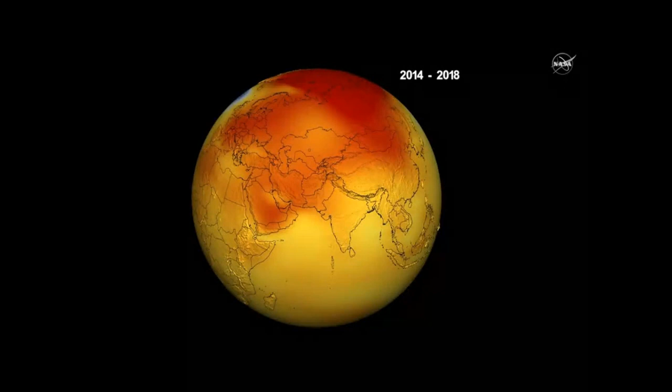And this is since the industrial revolutions. There is a link between our activity, mainly use of fossil fuels, and our emissions in the planet. If we imagine Earth as a system, it can regulate its temperature, and it has the ability to auto-regulate itself, like a negative feedback would do. But only when there are minor disturbances. In climate change and global warming, at some point the disturbances begin to be so high that the system becomes unstable, and they can have catastrophic impacts like pack ice melting, rise of ocean temperature, ocean acidification, the loss of regulation of CO2, and also de-icing of permafrost.

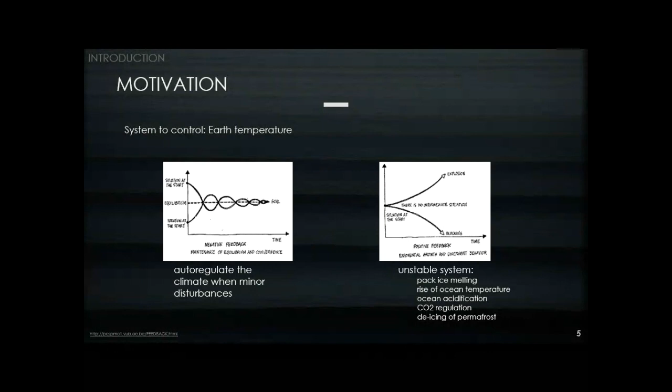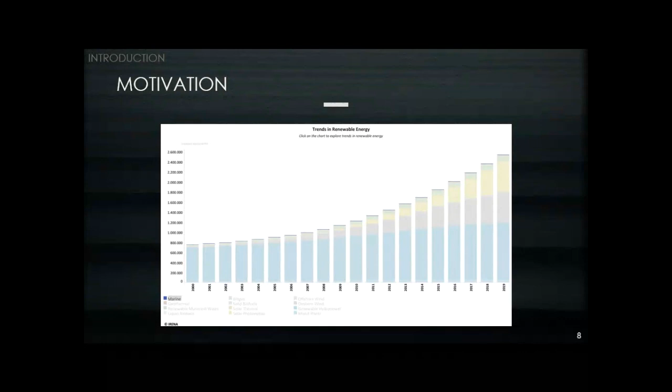In the past 20 years, here's the global trend for renewable energy capacity installation. 20 years ago, almost the majority of the installed capacity was hydropower. If you look at today, there is a huge increase and an important share of wind and solar energy. I think innovation is still ongoing there, but it's more incremental innovation, and I think there is space for research and development in marine energies. So there is motivation to work on that field. In these marine energy technologies, we can think of tidal energy, wave energy, osmosis, ocean thermal energy.

And the one I wanted to focus my work on is wave energy, because it represents a huge amount of power. The resource that is accessible in Europe can represent 3 times the European power consumption.

We know there's a huge amount of energy, and mankind has always tried to protect itself from ocean waves, building harbors or making more robust ships. There are a lot of challenges here. First, we want to produce power, but it's usually associated with costly operation and maintenance. The devices to capture power have to survive winter storms, and they are also subject to corrosion and biofouling.

Now moving on to some generalities. What are ocean waves? Wave energy is a sort of solar energy, because the sun creates wind and the wind creates the wave.

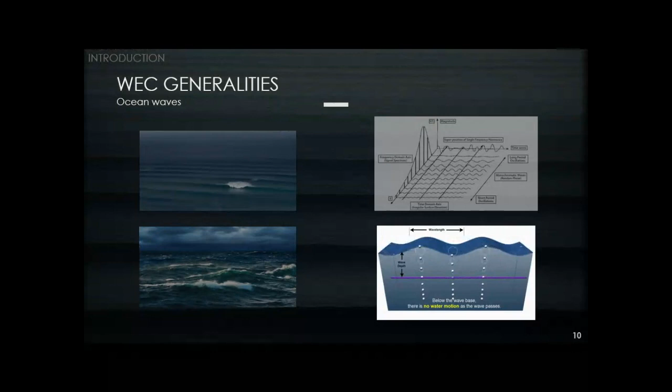There are several concepts that have been developed to capture this energy: the attenuator, a flap type, a point absorber, one which relies on pressure differentials, pitching devices, overtopping devices, and other more innovative designs relying on a deformable rubber material.

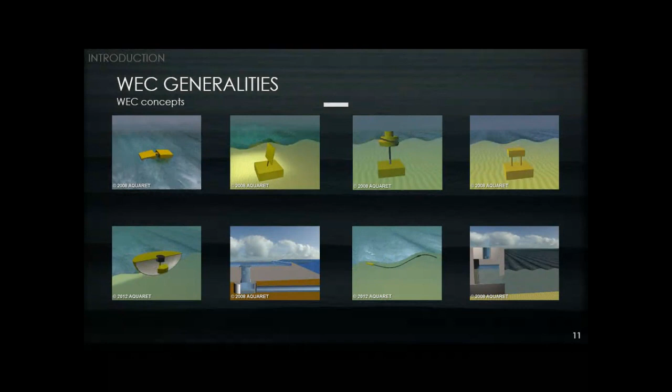What I wanted to state with these different concepts is that wave energy is not converging into a winning technology, like has been the case in wind energy, where we now have the three-blade horizontal axis turbine, which allows cost effectiveness and reliability. So there is still room for innovation here.

Now moving on to the scope of that research, I wanted to introduce some concepts here. In wave energy conversion modeling — how the devices move due to ocean waves — we rely on concepts of hydrodynamics.

These express the motion of the device and the several forces in presence, like the excitation force, which is felt by the body due to an ocean wave, radiation forces, hydrostatic forces, power takeoff force — the one we actually want to capture and convert into useful power — and other forces related to mooring forces and drag forces.

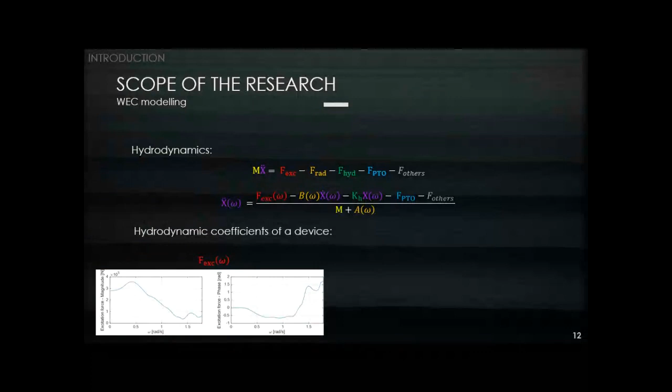What's important to notice here is a device has its own hydrodynamic coefficients. You can see its response in the excitation components, both amplitude and phase, and also added mass at infinity and radiation damping. These coefficients can be obtained using hydrodynamic solvers like WAMIT, NEMOH, or AQWA.

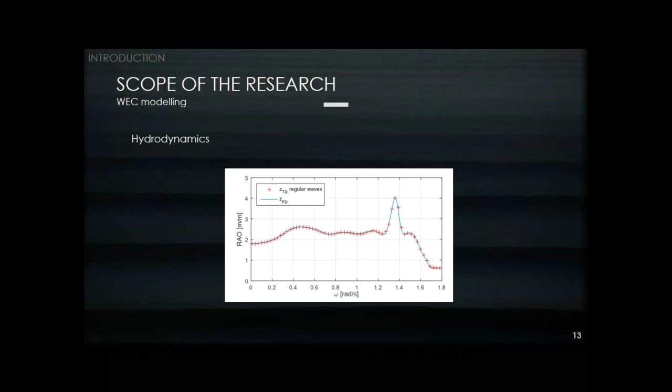Moving on to control for wave energy converters. Why do we want to control them? Well, of course, we want to extract power and optimize the energy output, but we want to do that while ensuring safe and reliable operation. We also apply control to ensure good grid connection and integration of power into the power network.

Earlier, you saw the force we are trying to optimize, which is the power takeoff force. It can be simplified as a damping coefficient, CPTO, proportional to the velocity, and a stiffness coefficient proportional to the position.

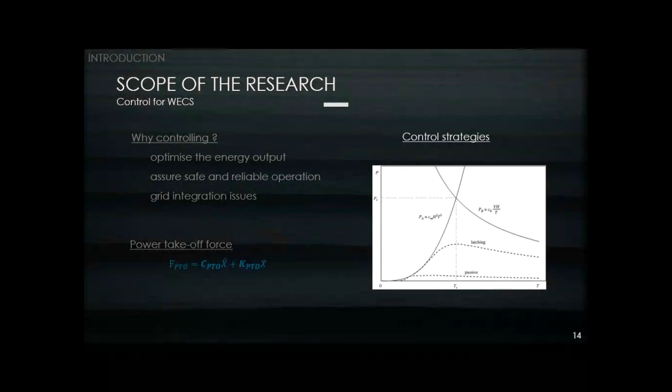It needs to have a force in the power takeoff. The power takeoff is able to give back energy to the system so that it can change its motion and be closer to resonance condition. There's another control strategy called latching. It's phase control, and it also tries to change the motion so we can recreate resonance. There's also a passive one, which is not very efficient.

What happens if we change the damping coefficient of that force? You remember the RAO of Mutriku, shown as the blue line. As soon as you increase the damping coefficient, you decrease the motion and extract power, which you see at the lower graphics. Globally, if you integrate across all frequencies, there is an optimal damping coefficient that lets you maximize the energy production.

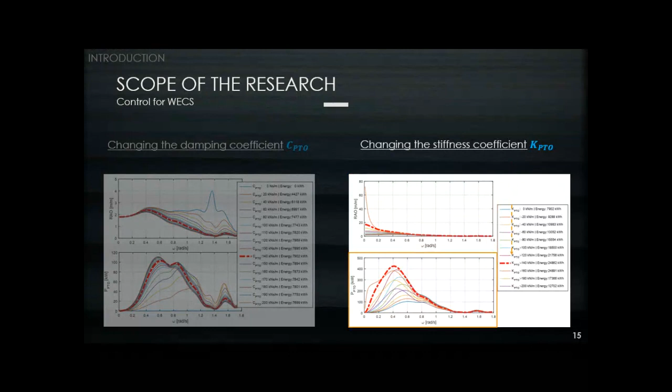And if we change the stiffness coefficient, you change the motion. There is a higher increase in the power production—the energy is in fact 3 times more important in that case.

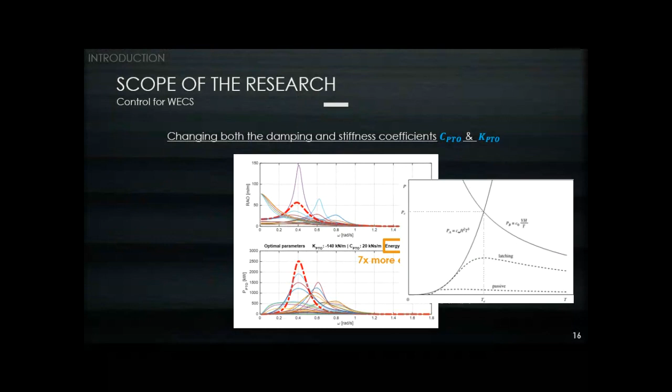So what happens if you optimize both of these parameters? The motion is way higher. For a 1 meter wave, at the resonant frequency, it can go up to 150 meters—not very feasible in practice—and the total energy is like 7 times more. You can see with this graph that you can make a parallel with the theoretical curves of maximum power extraction.

Then control for the oscillating water column. Here you can see the several steps of energy conversion from the wave to the wire, the electrical wire—this is why we call them wave-to-wire models. Where can we apply control here? We can apply control at the interaction between the wave and the device.

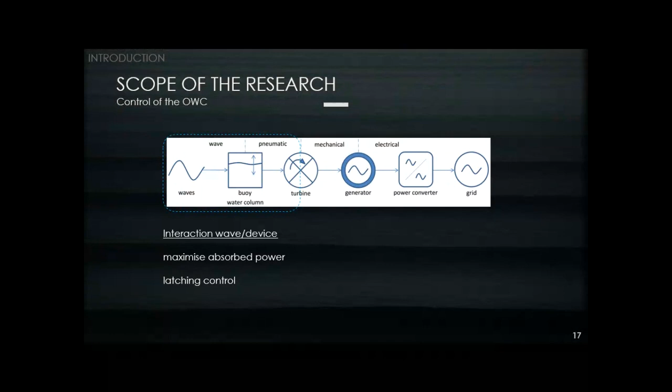We want to maximize the absorbed power, which can be done by latching control for the OWC. By actuating the latching valve, we can induce a perturbation in the pressure and change the motion of the device. Also, when there is absorbed power, we can control or optimize the energy production in the power takeoff.

So here you have several elements of the power takeoff, the turbine and generator, using rotational speed control. Also, which is not explored in that thesis sadly, grid interaction control—here you want to increase the quality of power you inject into the grid.

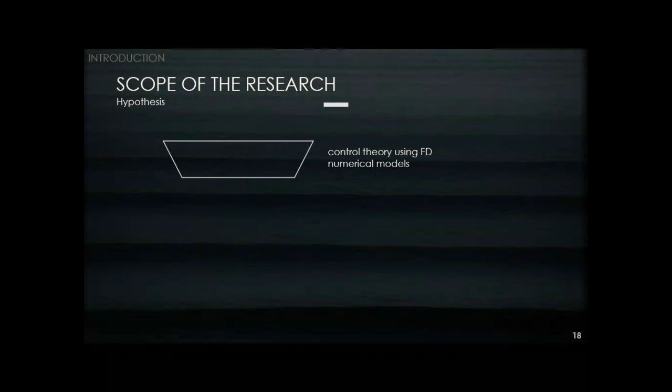Some hypotheses: I've seen in this research several or many references for control theory applied to wave energy conversion, most of the time in the frequency domain, and several approaches for applying this control in time domain models. This is also the case for predictive algorithms, which rely on knowledge of the future incident wave to optimize control parameters for better power extraction effect. But these algorithms, when entering control for oscillating systems, well there are not that many.

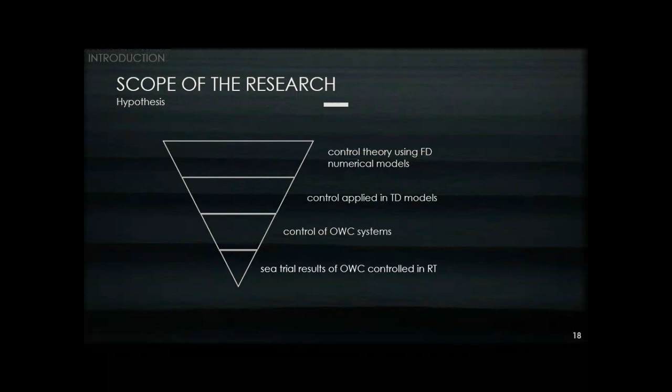In fact, for real sea trials of that type of algorithm in real oscillating water column devices, I only know of one. So there is room here for innovation, and this is one of the motivations of this work. It lacks experimental results for advanced controllers, especially predictive ones. To reach that, we need to develop these algorithms, test them, and assess them. To do that, we need accurate numerical models, and to reach experimental and sea trials, we also need to solve implementation issues.

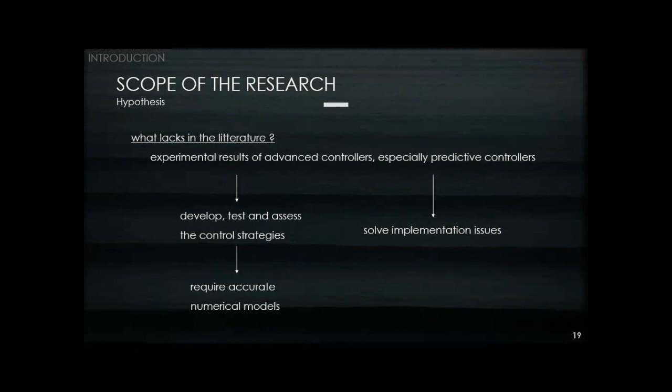The global objective of the wave energy sector is to lower what we call the LCOE, the cost of energy production—the ratio between costs and revenues. Revenues are associated with the quantity of energy you are producing. So the general goal of this thesis is to optimize this energy production through the use of advanced control strategies, and to reach sea trials to prove that these algorithms are actually viable.

In fact, we have some opportunities here in the Basque Country. We know of this device called the Mutriku, or oscillating water column plant. It was grid connected since 2011, has produced more than 2 gigawatt-hours of wave power injected to the grid. Also, a company named Oceantec, now acquired by IDOM, developed its Marmok buoy, installed at the test site close to Armintza for two years, surviving 3 winters. So there are opportunities for testing these algorithms in these 2 devices.

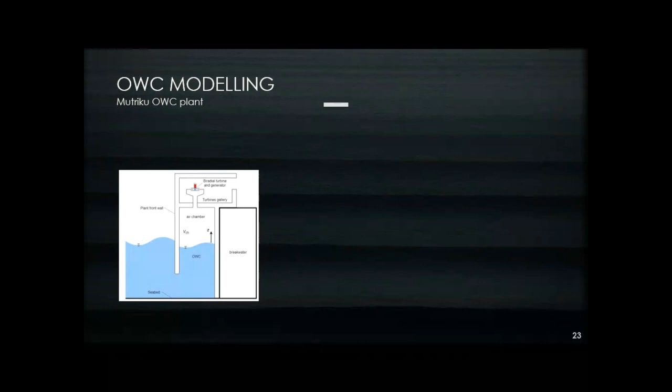This is a side view of one chamber of the Mutriku plant. This is the geometry of the plant and its surroundings, done to obtain the hydrodynamic coefficients, by some colleagues in the OPERA project. What's important to notice is that it's important to take into account the surroundings of the plant to capture all this changing in motion.

So seabed conditions are important, neighbor chambers also, and they are all integrated into that model. What I did here is, from these hydrodynamic coefficients, create the time domain model. Here you can see the excitation force, how it's expressed, the radiation force, hydrostatic, and power takeoff. The radiation force has a term called the convolution integral, and we have to use some methods to solve that—we'll be using the Prony method in that case.

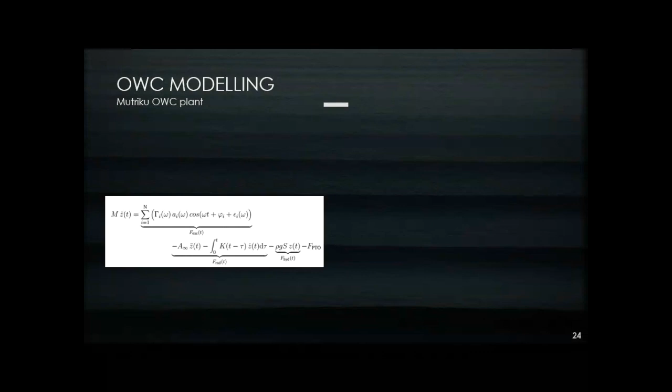Then moving to the spar-type oscillating water column, here is a side view also. What's important to see is that it has two bodies: one is the floater and the structure, the other is the water column itself inside the device. In fact, it's the relative motion between these two bodies—each has its own response, which creates the power absorption.

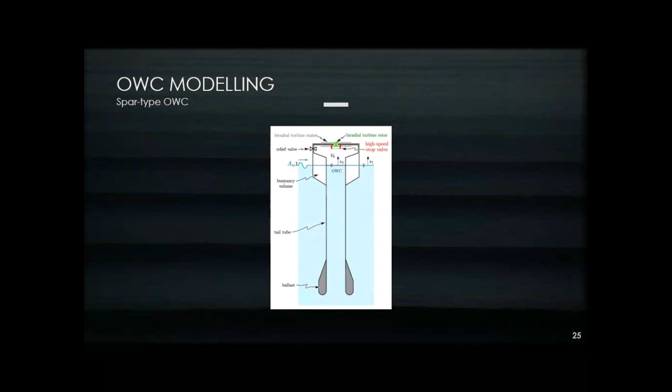Here we are on track. So we solved the motion of the device, and now we're moving to the modeling of the air chamber. In fact, the force of the power takeoff for an OWC is the force of the pressure inside the chamber—the pressure variations multiplied by the area of the internal water surface, the oscillating water column.

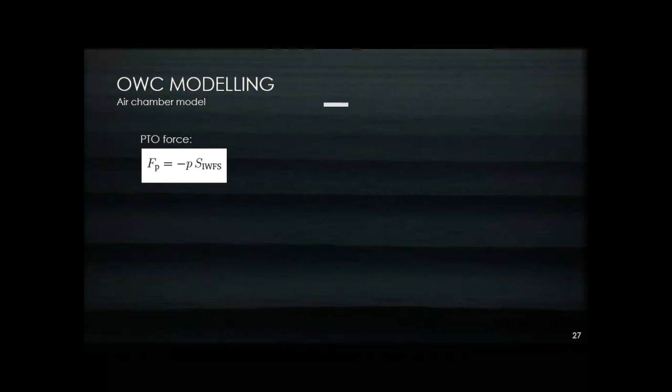But this pressure is a gas, and you can assume it is either incompressible or compressible. We wanted to model all three. The isentropic process is state of the art, and the polytropic is another contribution of this thesis.

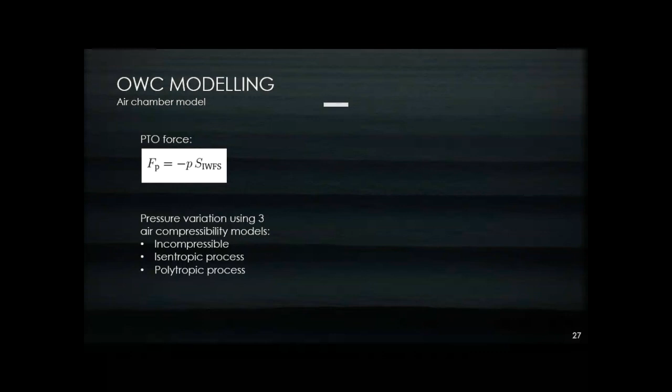What is the effect of that change in the pressure variations? We see some simulation results, time series of the three powers in presence: pneumatic, absorbed power, mechanical power of the turbine, and generator power, electricity. For all of that, there is a decrease of power when assuming there is a polytropic process.

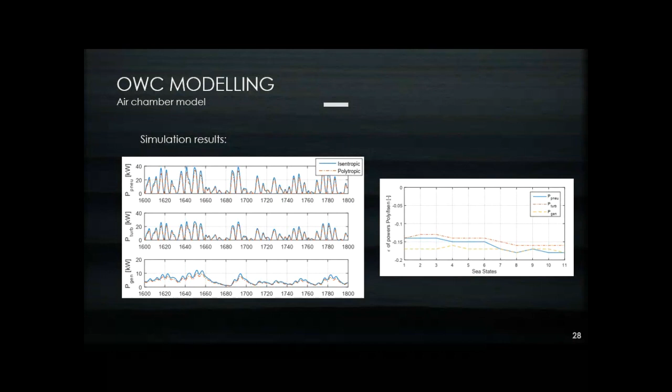Globally, when we do the simulations with several sea states, irregular sea states, we see a reduction of the generator average power of between 15 and 20%. So it's important here to take into account air compressibility first, and to be sure that you are using the right model.

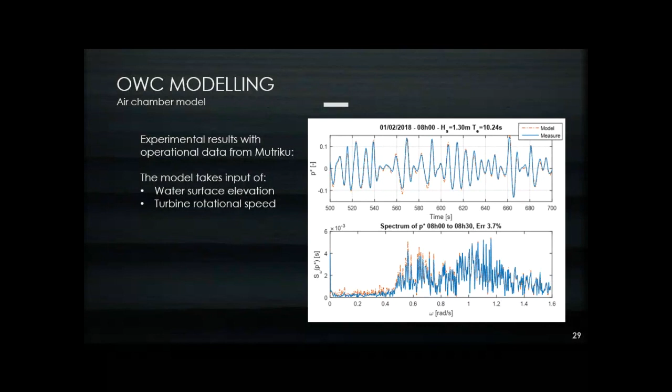Because we had access to the Mutriku plant, we wanted to know if this polytropic process was viable and a good solution to implement. We took inputs and measurements from the plant and compared the pressure with the model we were developing. In this specific sea state, there is quite good agreement in the pressure variation, with an overall error of about 4%. This has to be extrapolated to also several sea states.

Okay, so we solved the motion of the device. We saw that the pressure and the compressibility are important here. And now we are moving on to the power takeoff part, which is composed of air turbines.

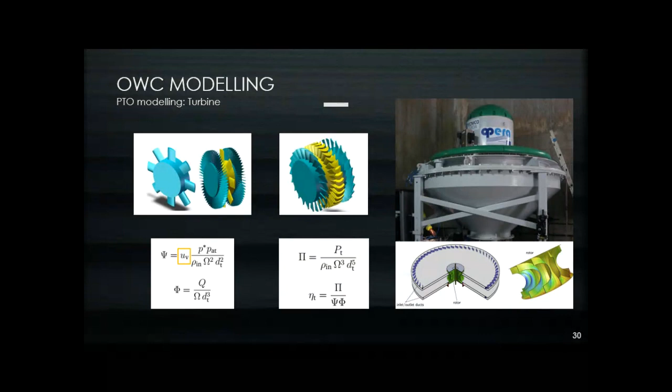This is all state-of-the-art, but I wanted to introduce some important equations here. There are dimensionless terms for pressure, airflow, power, and efficiency. For the pressure, the psi coefficient, there is an additional term, UV, which represents a safety valve set in series with the turbine. We actually close this valve when the energy in the system is too high, so it can be used to dissipate energy.

So now we are moving on to the electrical conversion. What was included in the model is a loss model of the electrical conversion at the generator.

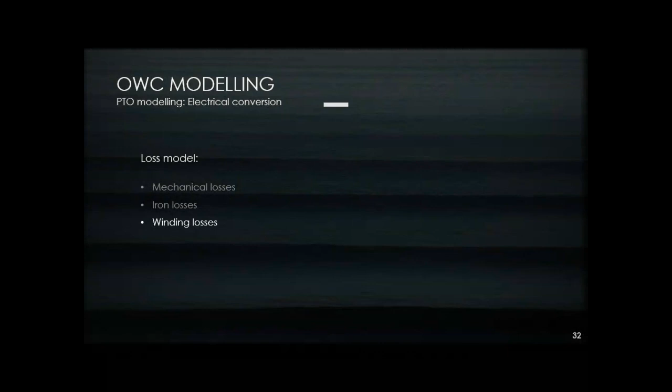Here we are using an induction generator. So basically, a loss model includes mechanical losses, mainly due to bearing friction, iron core losses, related to the magnetic field and eddy currents in the laminated plates of the generator, and winding losses, which represent heating and the loss of power by Joule effect, related to the quantity of copper inside the generator.

Also introduced as new contributions are the several operation regions of generators, like the one used in the project. Basically, you have a steady region with nominal torque up to maximal torque, which is fine for short periods of time. Depending on the rotational speed, at some point you lose the capacity to extract power — this is called the flux weakening region. At some point you want to stop production as the speed increases, up to a certain threshold, because at this speed vibrations are created that can damage both the turbine and the rotor inside the generator.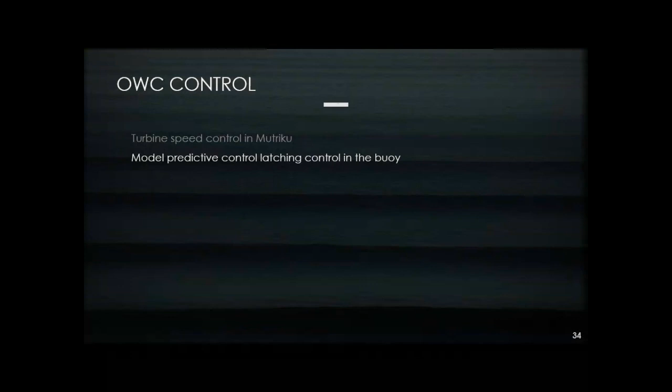So it's the end of the modeling part. Now we have numerical models for Mutriku and for the spar buoy, and we want to introduce control concepts and contributions in the turbine speed control for Mutriku, using also a predictive controller for these turbine speeds, and predictive control for the latching control strategy in the buoy. We'll see the approach for real-time implementation, especially for these predictive algorithms, and results of sea trials at Mutriku and experience learned, then results at the BiMEP test site with the Marmok.

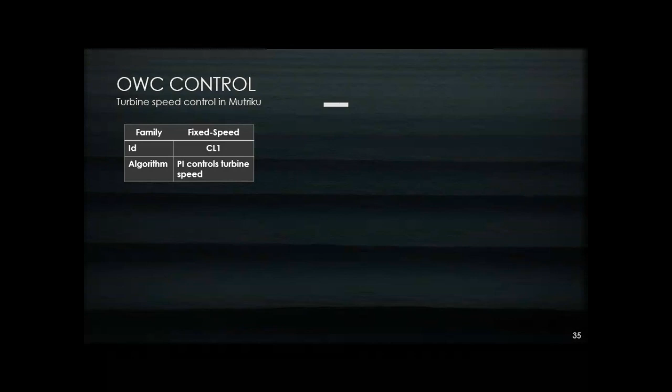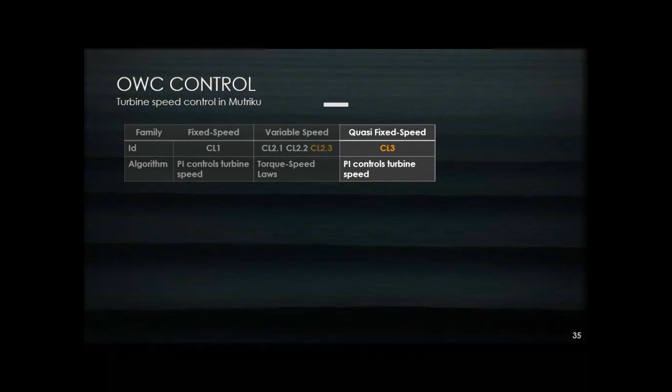So first of all, turbine speed control for Mutriku. The first, which was adapted from reference state-of-the-art laws, is fixed speed turbine control. Another family is variable speed, relying on a torque-speed relation, like we see in wind turbine technologies. Another tries to improve fixed speed, called quasi-fixed speed, relying on a PI controller. And the last two are nonlinear model predictive control, which can parameterize control parameters of the torque speed laws. The fixed speed law is sea-state dependent, so it's not very easily implementable. The others are called adaptive controllers, operable in any sea conditions. What you see in orange are 4 new contributions of this thesis.

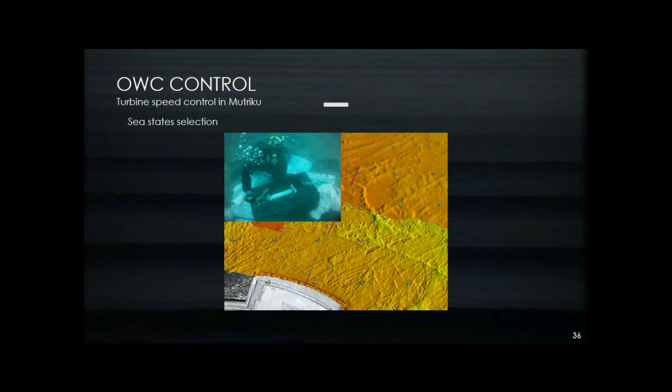So we'll be using the Mutriku numerical model, with the power takeoff designed for Opera. We had access to the Mutriku plant, and for a test period during the campaign, we installed what we call the pressure sensor. This pressure sensor gives us the wave elevation, and by a process we can obtain what we call a wave climate.

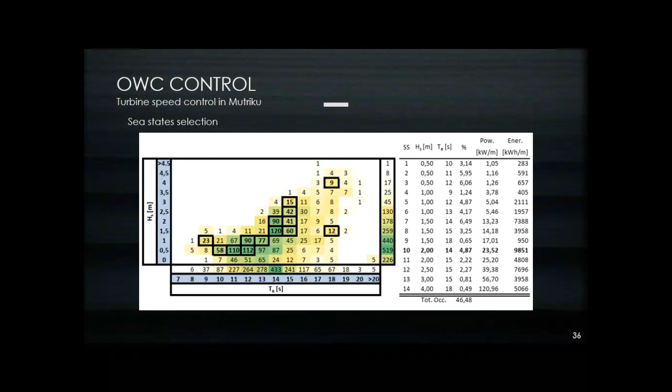A wave climate is a scatter diagram showing the relation between sea states characterized by wave height and energy period. I extracted 14 of the most representative sea states with a wide variety of power, representing 50% of the global wave climate. In bold here you see sea state number 10, which isn't the most powerful, but is the most energetic one when you account for frequency of occurrence. This sea state will be used in some examples to show results, since it's the most representative.

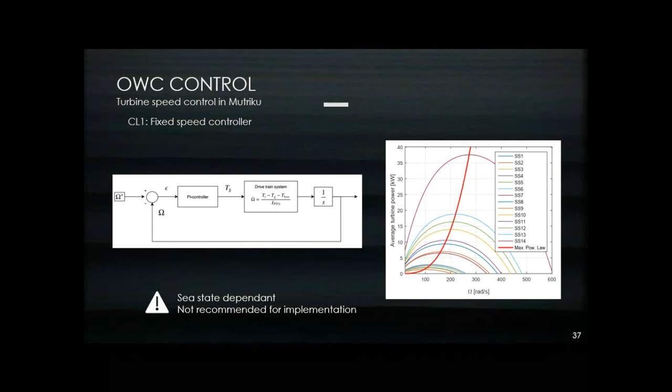Moving on to the first control law, fixed-speed turbine control relies on one reference speed controlled by a PI controller. To find that reference speed, you need the numerical model and an offline optimization: for each sea state, you find the optimal rotational speed that gives the maximal average turbine power. This represents the damping coefficient in the power takeoff force we saw earlier, so there is an optimal power extraction. But remember this control law is sea-state dependent, so it's not very recommended for implementation, because you have to know the sea state at each moment.

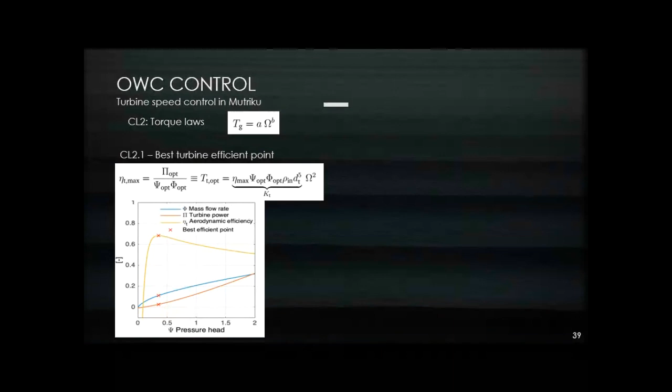Now we want to move on to variable speed controls, the second family, the torque laws. Basically a torque law means depending on the speed, you apply a torque to the generator. These curves are characterized by slope coefficient A and exponent B. The first and most basic law is based on the best turbine efficiency point: you want to set the turbine at its best efficiency, associated with an optimal pressure, flow and power. By working with the equations, you can extract a coefficient KT, which multiplies the speed squared.

The second law comes from when we performed the optimization for fixed speed: we saw the optimal speed that gave the maximal average turbine power. When you join all the dots, you get this red line, and you can extract the A and B coefficients of that curve to characterize this law.

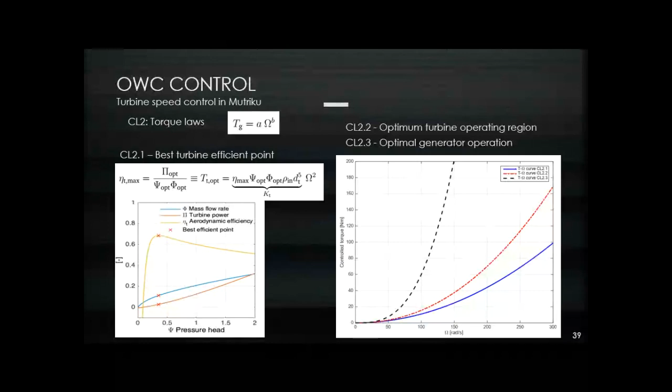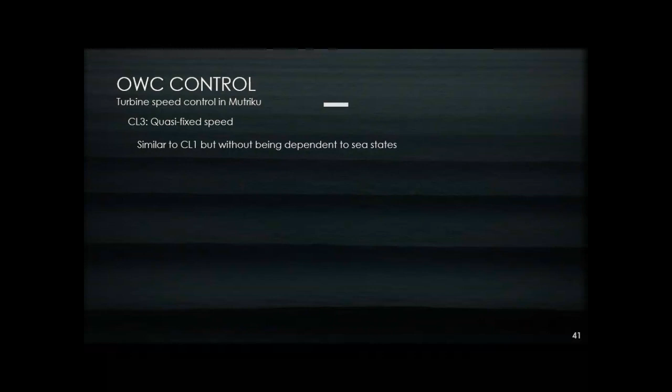It is similar to CL1, but we want to solve the issue of the dependency of the sea states. So we have to find a way to change the reference speed, but with process variables or with operating variables. And here we are using pressure.

When we compute that pressure and we include it into a sliding standard deviation, it's a moving window of about 3 minutes here. We can obtain the standard deviation. We multiply that by a certain gain, and we obtain a reference speed. This is what is shown in this equation.

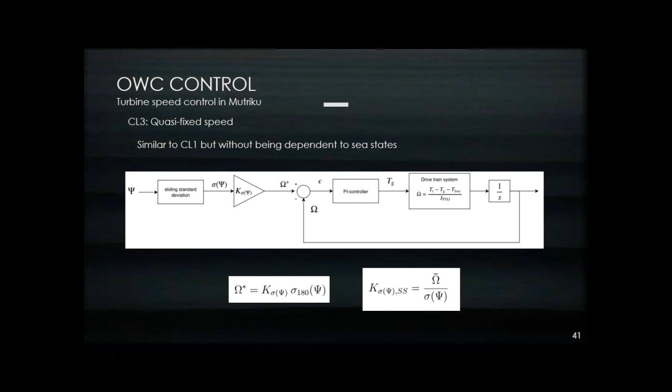And in fact, this gain is obtained by the optimal parameters that were extracted earlier for the offline optimization. And we make the average of this gain for all the sea states, and you're done.

Here are some simulation results. You see that in comparison with the fixed speed law, there is a change of the speed, both the reference and the feedback speed, and you see that it has a more stable shape than with the torque laws.

And what we can see here also is that this change of speed reference quite follows the energy of a set of waves coming.

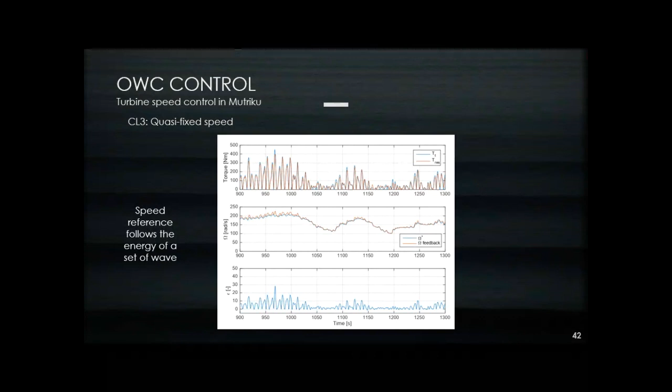Okay. Now we are moving to a nonlinear model predictive control that has been developed in that work. So you see that it can adapt and process optimization using future wave excitation, and the numerical model that has been developed with all these nonlinearities, with the air chamber, the turbine efficiency, generator loss model.

This graphic here shows the process and the approach for the optimization. And in fact, at a certain point, we trigger the optimization over what we call a prediction horizon. This is around a two-wave period.

And during that time, we optimize the control parameters, A and B, slope and exponent, so they will characterize the torque speed curves. And we do that at each replanning period. The replanning period can be basically half of the prediction horizon. So there is,

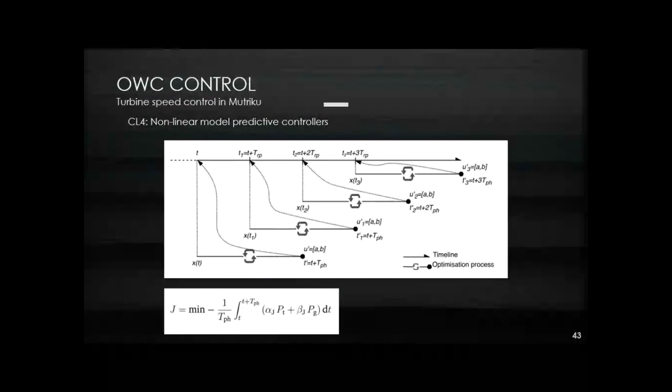to perform this optimization, what's important to have is the objective function. But here we want to maximize average powers, not only for the turbine or for the generator, but both of them. And you see here there are weighting coefficients, alpha and beta, so we can set more importance to the turbine or the generator conversion.

And we wanted to include additional constraints in another version of that law, because we witnessed that these controllers were always tending to maximize the power extraction, and we wanted to include additional concerns of reliability for the components in the power takeoff. So here the same, we see a time series of simulation results for these two versions of the model predictive control.

And the generator torque simulation results are the same for a certain period of time. What you see on this orange box are the different approaches, and the fact that at some point the second version tries to lower the power extraction and dissipates energy by the use of the valve to have a better reliability score.

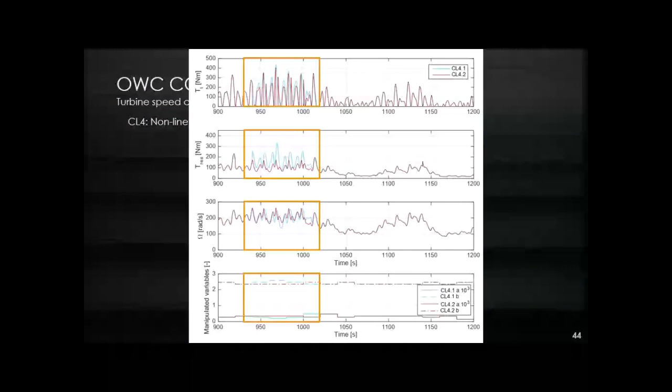And here you see that the A and B coefficients, the evolution, at the beginning they are the same, at the end the same, and there is a change of approach between these two controllers. You see that basically the first version always wants to maximize the power extraction, and the second one has additional concerns on the component's reliability.

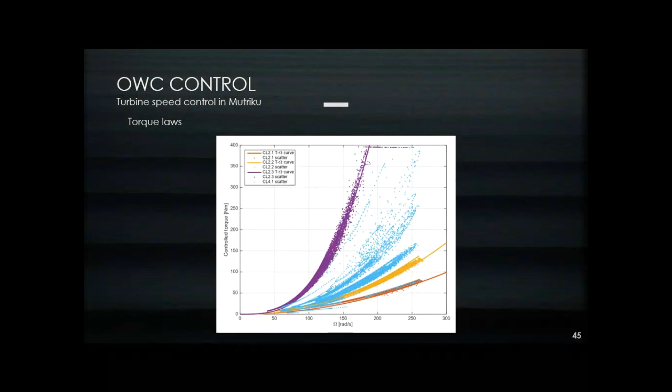In this picture, you can see the four torque speed approaches. Three are the torque variable speed families based on offline or generator consideration. The blue dots are several shapes or torques of the predictive controller. You see it can populate a wider area while the other controllers are quite static, adapting to both external conditions like waves and internal conditions, since all the components and motion are taken into account.

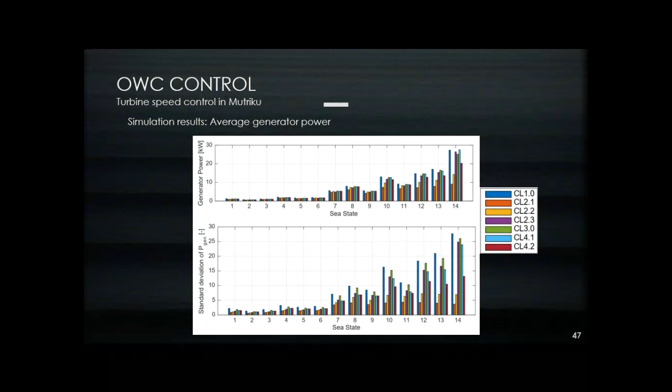I also wanted to include a score for reliability. When we compute the standard deviation of the generator power, this means we are taking into account power peaks in the sea state, and globally we see that some controllers have additional concerns about power takeoff components. The second version of the predictive algorithm divides by 2 the standard deviation compared to the first version. So it is effective and working as expected.

Now closing the chapter of speed controllers, we move on to the implementation in simulation of predictive latching control, based on pressure thresholds. We are using the same algorithm as previously, but instead of optimizing slope and exponent, we want to optimize pressure thresholds.

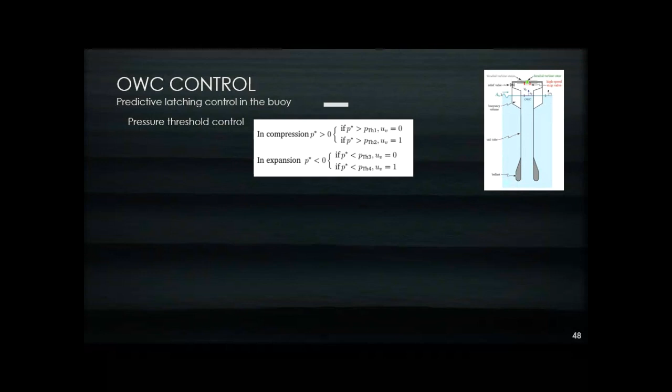When there is pressure variation, when the pressure goes over these thresholds, it orders the valve, the shut-off valve in front of the turbine, to close and open. By this opening and closing, we were able to change the motion of the device, and this is what we want to prove with that algorithm.

We saw an effect on the pressure, and we want to see if it also has an effect on the motion. So we take here the excitation force and the relative velocity between the two bodies. If you want to create resonance conditions, you want the phase of the excitation force and of the velocity to match, and this is what is shown on this graphic. The red curve is when the latching strategy is on, and there is a change of phase, getting closer to the excitation force, and also we see an increase in amplitude.

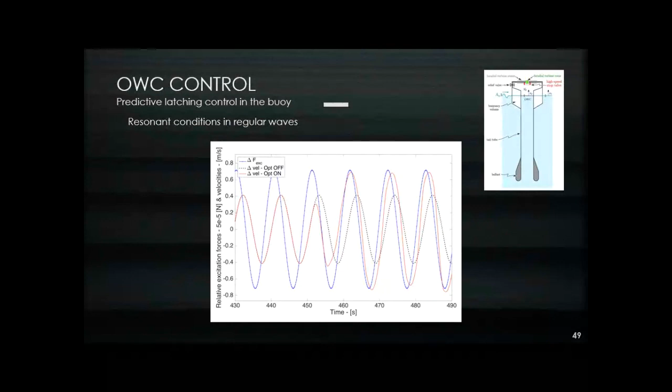So in theory, with these regular wave simulations, we see a huge increase in power production. But when we go to irregular waves, there is still an increase, but not as significant as expected. Globally, taking several systems, we see an increase in generator average power of around 6 to 25%. So there is still an increase, but you have to balance the complexity of the algorithm against the results. So this algorithm was not selected to test in real sea conditions.

So now moving on to the real-time implementation.

So to make sure that we can bring the model predictive control into Mutriku and BiMEP, we want to make sure that they will work properly. So for that, we are using a test rig, a test bench to perform the validation. Basically, the test bench used is composed of two electrical machines, a motor and the generator. From one side, there is what we call the emulation of the device, so the motor will provide the torque similar to the turbine. On the right side, you have all the real components in the power extraction: the generator, the power converter, and the control unit.

This was based on XPC target configuration, so we could easily play with our numerical models and make some tests in this infrastructure. The implementation of the predictive algorithm was done in an external PC that had some connections with the test bench to avoid overloading the control unit. This is a picture of the real setup in Tecnalia that was used.

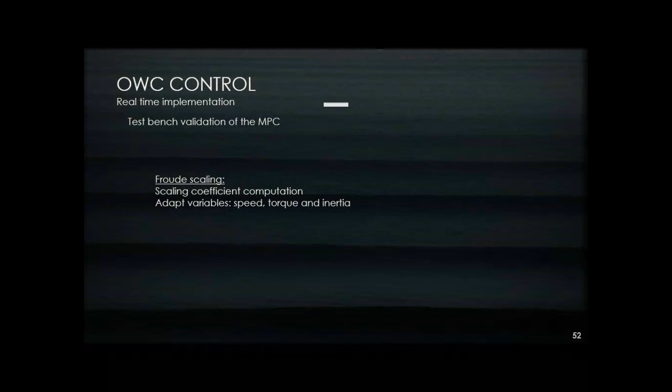To perform the validation, basically we have the same numerical models running in parallel. One will be strictly simulated, and the other one has input and output to the test bench. So we are able to compare the results, both experimental and numerical.

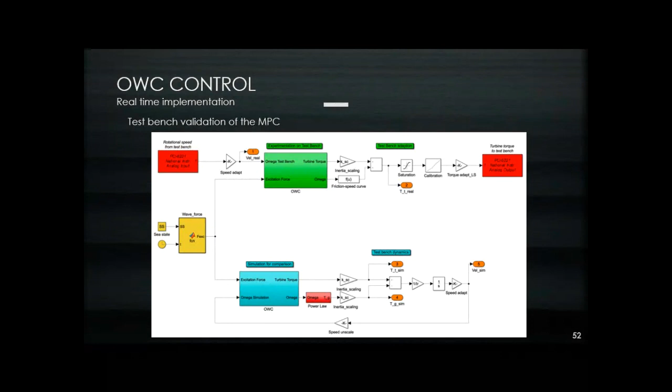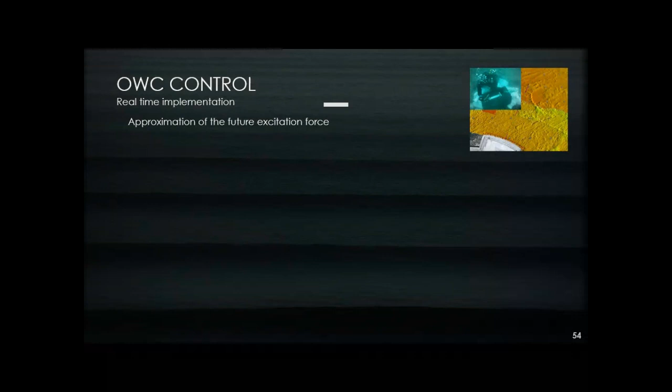So now we have the controller validated. We know that it works in a control unit. We know that it will not be harmful for the system. So we are now moving on. We have another thing to solve: the excitation force estimation or computation, because we need this excitation force so the model is then able to apply its optimization process. So we need to compute that excitation force.

In Mutriku, you remember we had this pressure sensor installed in front of the plant. So we know that we can have the value of the wave elevation, and we connected this value and integrated it into the control unit, where we can compute the excitation force. In the literature, we see that this computation in time domain of the excitation force is a convolution between Kx, which is an impulse response function for the excitation, and the wave elevation. We see it's the same as for the radiation: there is a convolution integral to solve, and we are using the same method as explained earlier.

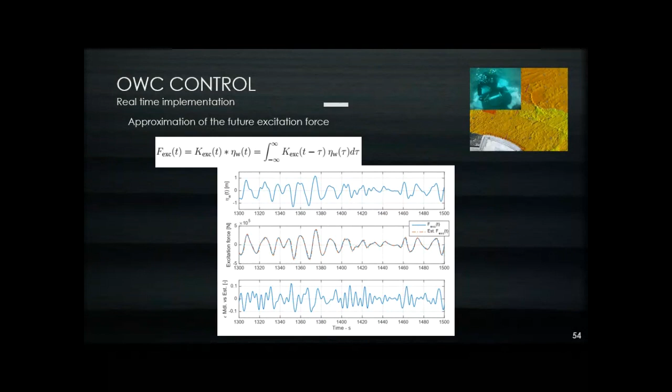Here is a graph to validate if this approach is correct, and in fact it is. You see that there is an error between the modeled excitation force and the computed one, which is around plus or minus 10%. So it actually works.

Now we've solved all the issues of implementation, so we can move on to the Mutriku power plant, implement all these algorithms, and in fact we were able to test for two weeks in June 2018. This was the sea states that were present during that testing campaign. Well, June is not known for its highest energetic sea states, so we were witnessing waves between half a meter and one meter, but still we had the chance to test.

Over 325 half-hour tests, and we wanted to compare the torque-speed law, this simple maximum power law you saw, and the predictive controller. So the procedure was to run one algorithm for half an hour and change to the other one for another half an hour, and so on. We were capable of having the same sea states within one hour, basically, so we were able to compare them.

Talking about the predictive algorithm, we need to initialize the prediction horizon time and the replanning period. We know the pressure sensor is static, and we know the distance between the two, but we need to compute the maximal predictive horizon, the maximum time we have for the process.

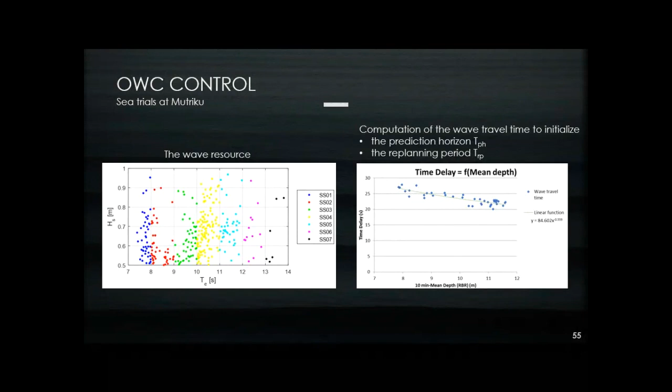When there is a change of tide level, because we are quite close to the coast, the travel time of wave can change. Here is a way to compute the time delay as a function of the water depth.

We wanted in the first test to validate the implementation of the predictive controller, and one way to do that is to set the control coefficients far away from their optimal values and run the algorithm for several hours. Here is a test of 20 hours.

We were also able to compare and validate the numerical model with the process variables because we had values of the numerical model with the implementation process, and we had measurements from the sensors. There are three variables of importance: the velocity, the position for the motion, and the relative pressure.

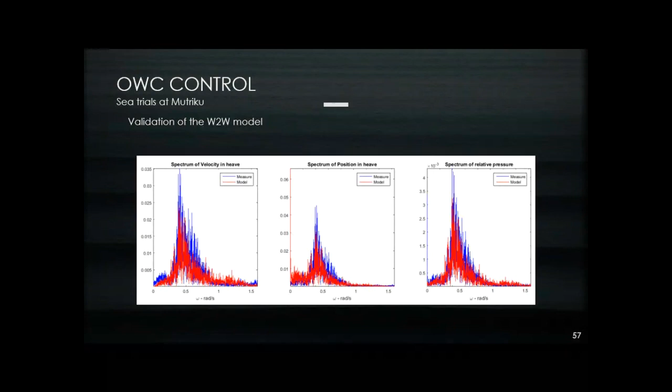When we take into account the frequency of occurrence of all the sea states, we can have a weighted average, and the improvement in power extraction for the model predictive controller is higher than 30%. So it is quite encouraging.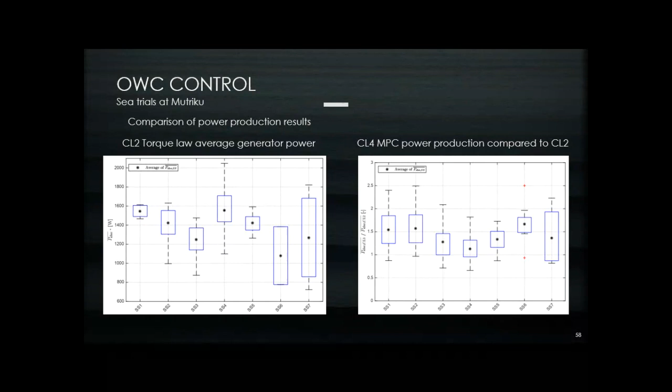If we focus not only on the power extraction, but on the efficiency of the power takeoff components, we can see that the simple torque law tries to optimize the turbine efficiency. Here you see several dots, each representing a half-hour test, while the predictive MPC tries to focus on the global power takeoff efficiency.

This is why the production is higher, because it takes into account not only the turbine or mechanical energy, but all the components of the power takeoff. This is a major improvement.

We know that results were encouraging in Mutriku, so we had the opportunity to test at the BiMEP site with the Marmok buoy. Here is a bit of the framework of the test.

We have a wave buoy situated in front of the Marmok buoy, and it can send wave elevation data to an onshore computer. This onshore computer performs the optimization process and can send to the PLC the A and B coefficients.

There is another version of the MPC, developed in collaboration with partners from the University of Sevilla, which tends to put this optimization algorithm directly inside the PLC, and we actually managed to do it.

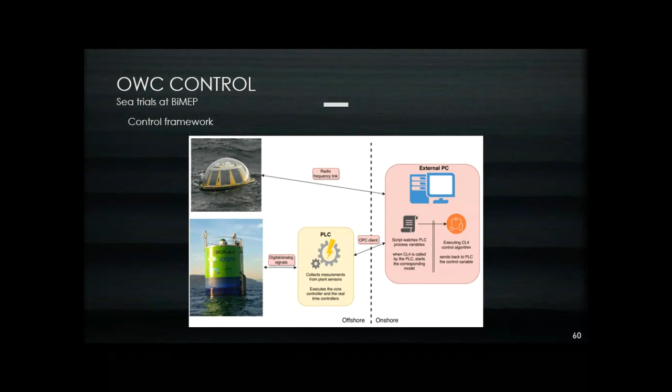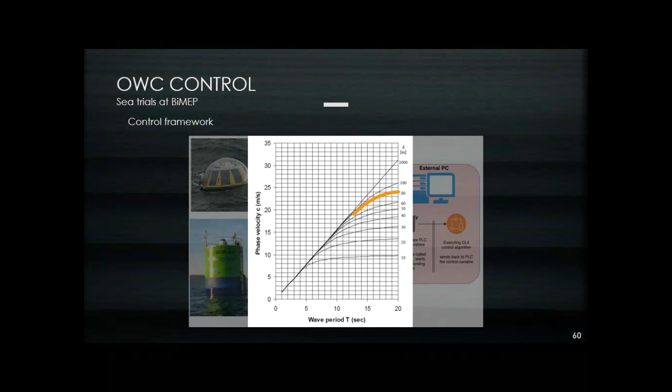Same as before for Mutriku, we need to know the distance between the wave buoy and the Marmok, done by computing with GPS position the distance between them. We also know that the phase velocity of waves can depend on the water depth and the wave period. At each beginning of test, we computed the phase velocity to initialize the prediction horizon and the replanning period.

Same as for Mutriku, we wanted to make a convergence test. Here you see the evolution of the control parameters for a 3-hour test, and another one for a 5-hour test.

What I forgot to mention is that these tests were run during June, but one year later, 2019. We were not lucky to have a wide variety of sea states, and the majority of sea states were around 1 meter.

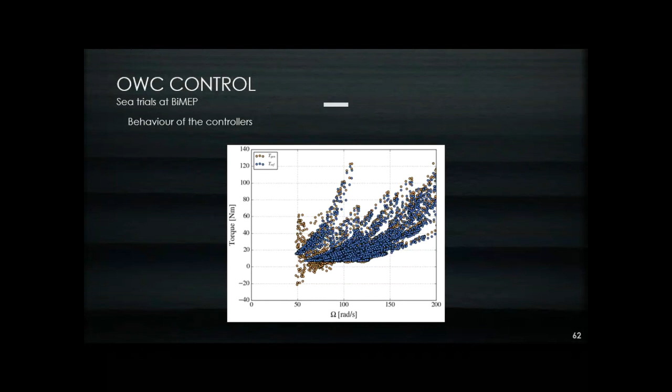Same as before, we wanted to highlight the fact that the MPC can populate the scatter diagram of the generator torque as a function of the rotational speed. So it proves that it's not static, it can adapt to the conditions. That's a good improvement.

When focusing on performance results, since the Marmok plant is developed by a company, we had some confidentiality issues and could not show results as a function of sea states for comparison. But what we did have is average efficiencies as a function of RMS values of the pressure.

Here you see that on average the efficiency is quite high. We were not able in that test to compare with the simple torque law, so we only have the two predictive controllers. The basic difference is in the implementation of these controllers.

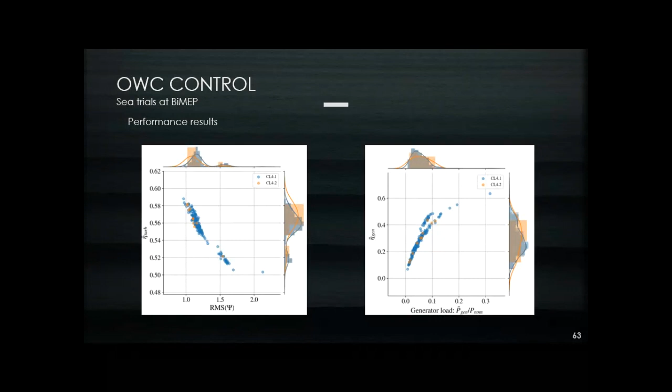We can also see results for the average generator efficiency, as a function of the generator load, which is the ratio between average generator power for this test over the nominal power of the generator. You see two different areas: one is strictly close to a line which matches the global generator efficiency curve, and there is another cluster. This proves that depending on the predictive algorithm, it can adapt and show several shapes and different results.

As a summary of the contributions, I would say we managed to develop what is today the most accurate numerical wave-to-wire model, because this is what is in the literature.

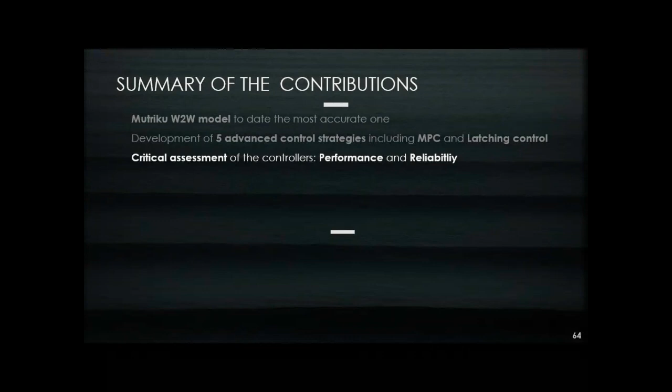We were able to develop five advanced control strategies, some based on MPC algorithms and one with latching control. We were also able to provide critical assessments taking into account both performance and reliability, and we achieved the first real-time implementation and sea trial results for a predictive control algorithm in turbine speed control.

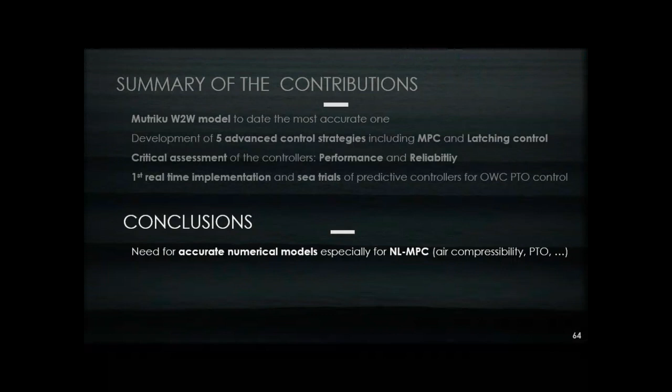To conclude, we saw there was a clear need for accuracy in the numerical models, especially for the predictive controller. We need the best accuracy with nonlinear concepts like compressibility and power takeoff. We also saw that MPC algorithms have the potential to greatly improve power production.

In fact, it has negligible capex, so we can prove there is a decrease of the LCOE while using predictive controllers. Additionally, we saw there is higher complexity when doing real-time implementation of predictive controllers.

Moving on to future works, we know there is still room for improvement in the wave-to-wire model for the Mutriku plant when comparing numerical results and measurements. We also need to test the predictive algorithms in a wider variety of sea states, because our tests were done only in summertime, so we could not clearly see improvements in reliability of the constrained predictive controller.

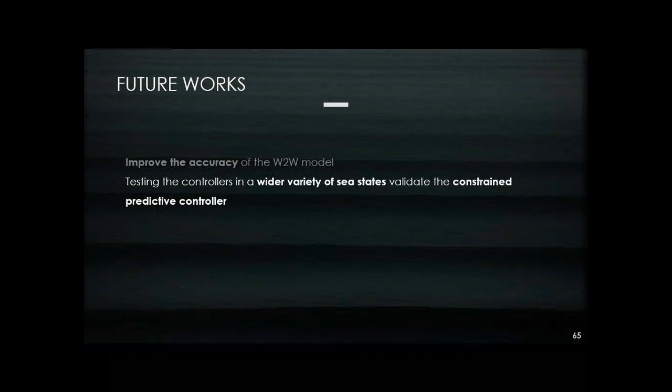Also, it could be interesting to implement in the optimization process not just maximization of power, but a global LCOE optimization, taking into account reliability scores, for example.

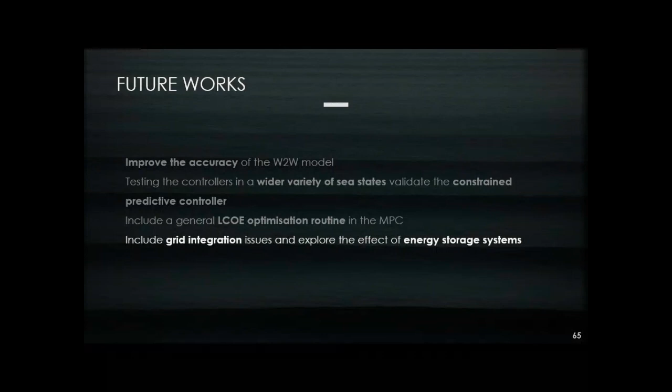It could also be interesting to focus on grid integration issues, because wave energy production creates peaks of power that can cause issues with the grid. Why not think of an energy storage system to try to smooth this power output?

Finally, we had access to a huge quantity of results during those sea trials, and we can think of a way to use these results with artificial intelligence algorithms to find patterns, select control algorithms, and get rid of the MPC implementation complexity or the estimation of forces.

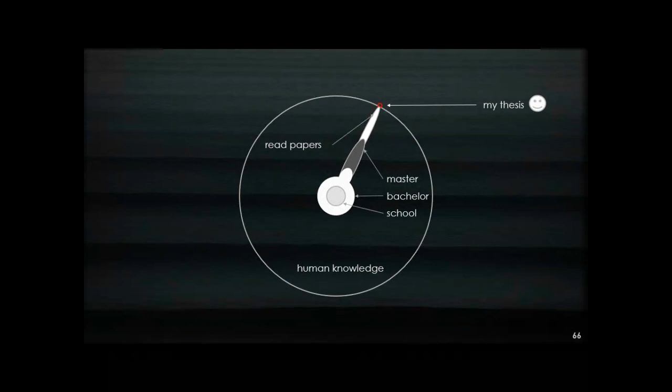One final word, if I may. When I asked someone to explain what a PhD thesis is, he drew a circle representing human knowledge. At the beginning, in school, you have global knowledge increasing in all directions. In university, during your bachelor, you start to specialize in one direction. In the master, you go deeper, and when studying your PhD and reading papers, you go further still. So finally, a thesis is this little bubble in human knowledge.

I hope this work I presented today can help and inspire other academics or people in the field to continue developing wave energy conversion, so we can have a higher increase of marine energies in the global mix.